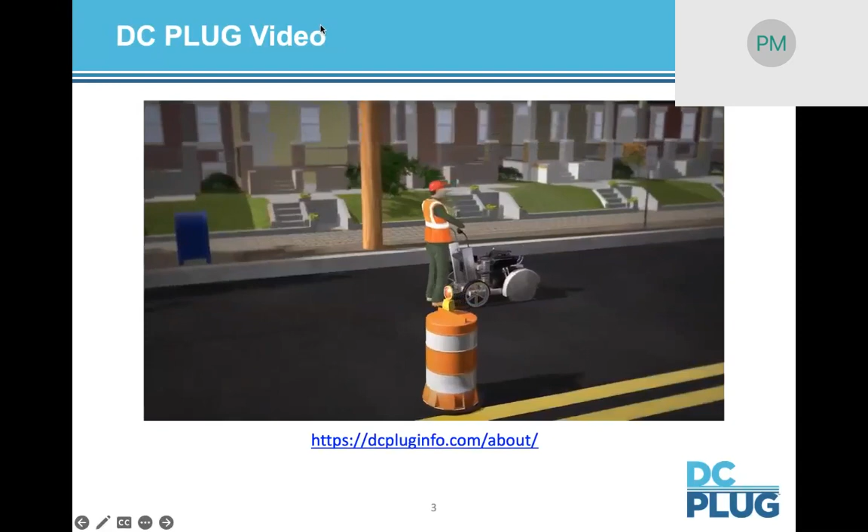Any public property disturbed by this work will be restored to its original condition. Construction workers will use asphalt saws to cut the pavement. A backhoe will dig a trench for the placement of the distribution line. Periodically along the main primary line, manholes and handholes will be required to house equipment and to provide access for inspections and repairs.

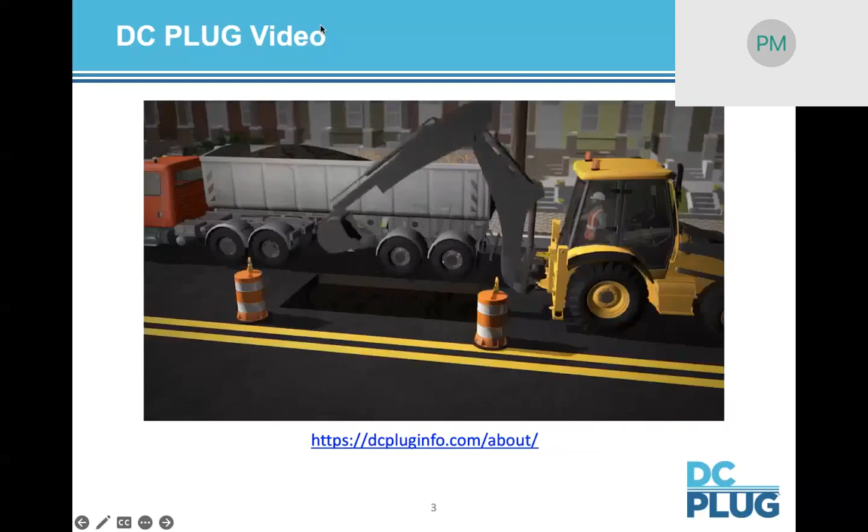The backhoe will also be utilized in these cases to excavate for these structures. In order to meet jurisdictional safety requirements, shoring will be provided in the trench to ensure stability. Pepco uses either fiberglass or plastic PVC conduit to protect underground power lines. Concrete will be poured into the trench to encase and secure the conduit, and steel plates will be placed over the trench temporarily to make the road usable to vehicle traffic.

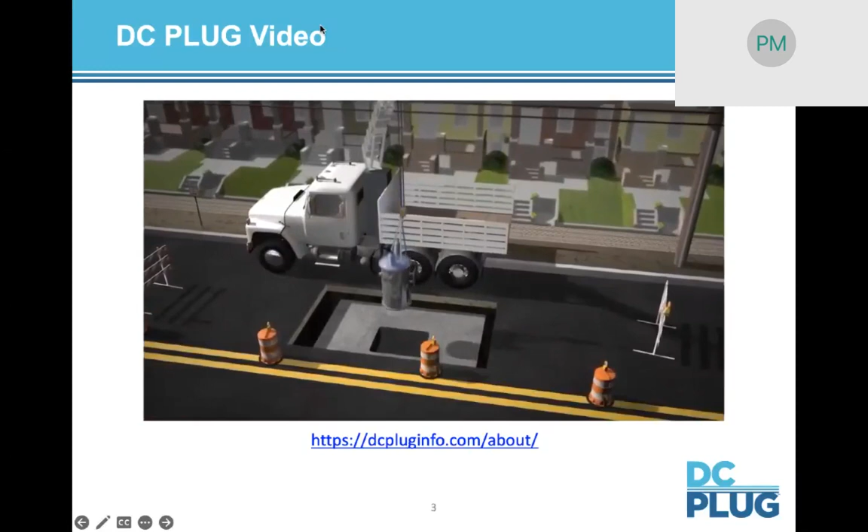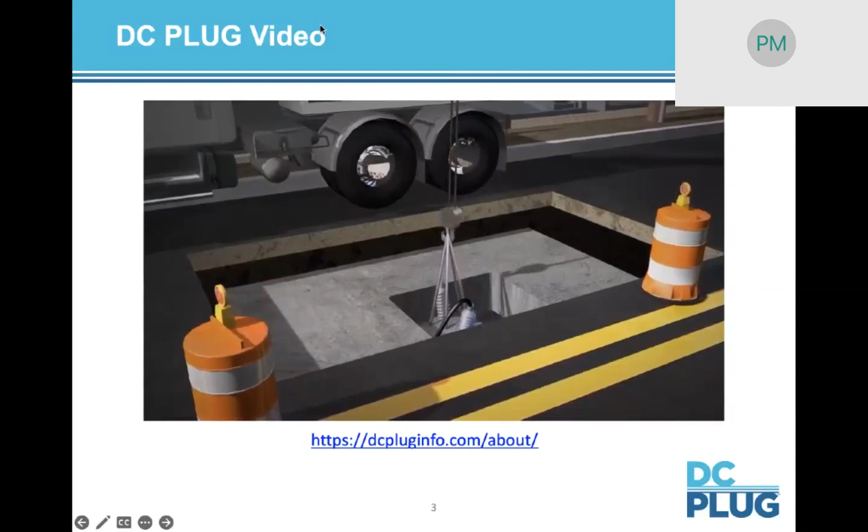After the concrete is set, the steel plates will be removed and the trench will be repaved in sections. Transformers, switches, and other ancillary equipment will be set in place, installed either in the roadway or the sidewalk depending on space availability. Underground cable will be installed. Landscaping will be restored as needed and roads paved.

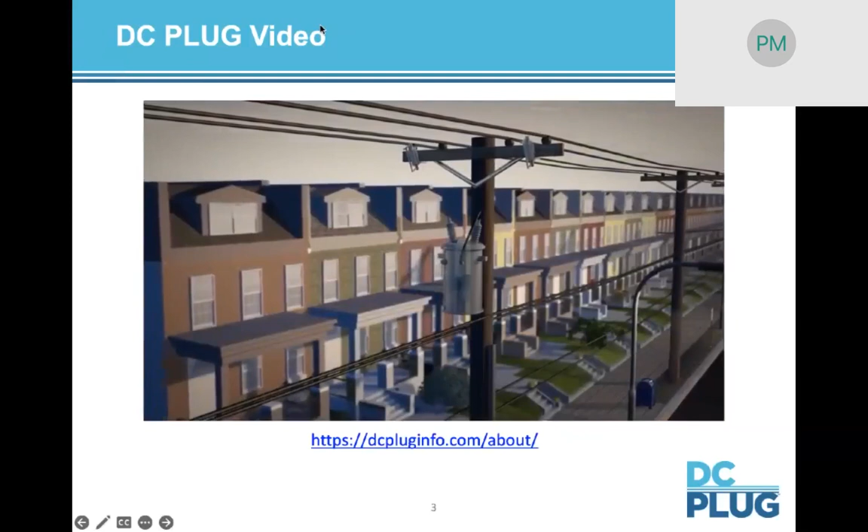Overhead primary electric wires will be removed from poles, but secondary service and communication lines will remain. Finally, the new underground power lines will be energized. While electricity will remain on throughout the project, there will be a short scheduled outage needed to switch from the overhead lines to the new underground system. We appreciate your patience while the District and Pepco improve the future of electrical service for the District of Columbia residents.

I hope that gives you a brief understanding of what construction will look like when that comes. Again, for this feeder, this is currently a design project, so we are some time away from construction, and right now we're just trying to get a good understanding of any feedback you may have on what our current design looks like.

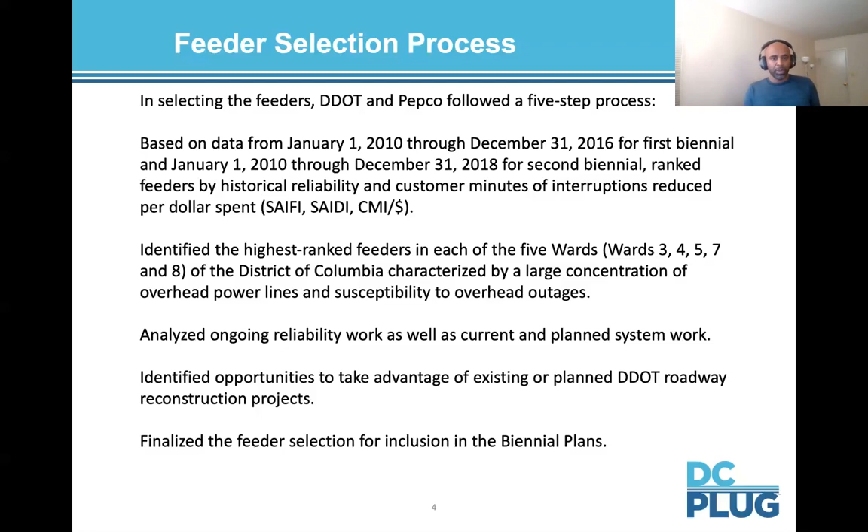Next slide. So what does DC Plug do? We've shown it in a video, but the scope of DC Plug can be summarized by this diagram here and the next one.

In the current overhead state of the distribution systems, where we have the primaries, laterals, and secondaries already overhead, if a tree falls, as depicted at the middle top of the page, you can see a tree falling and hitting the primary lines, and the houses changing from green to red. That shows the houses have lost power.

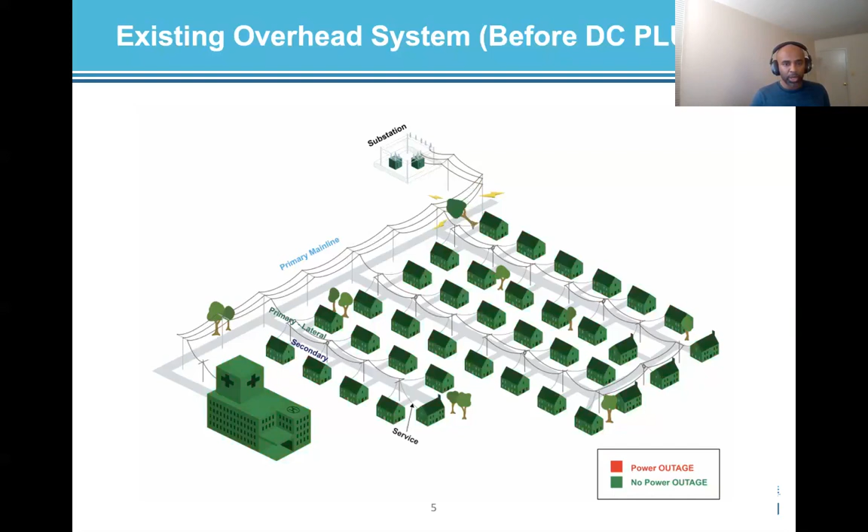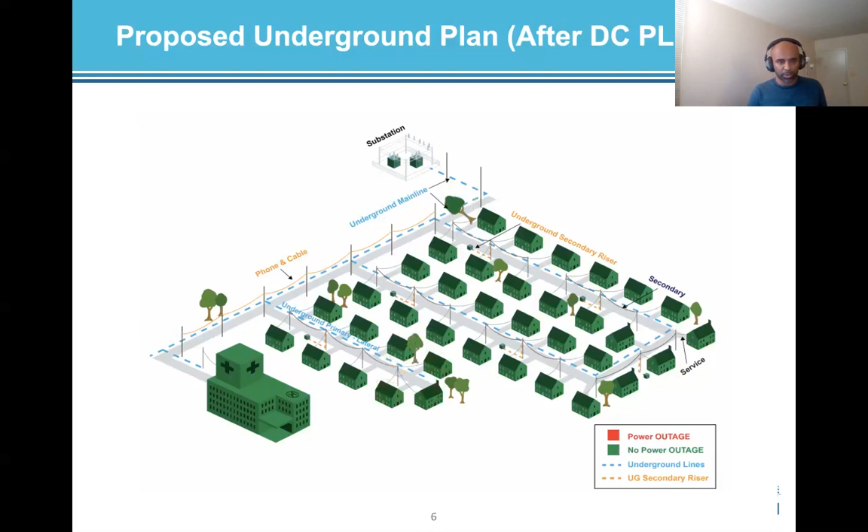Next slide. With that, I'll pass it on to Anthony Soriano from DDOT.

Thanks so much, Imani. What we see here is our current status and timeline for the Feeder 15171 design. We kicked this project off back in April of 2022. We had various submissions, 30%, and our most recent was 65%, just in November.

Over the course of the design, we've had a meeting with our council member in Ward 8, and also attended ANC meetings for those ANCs that the footprint of this project falls within. Currently, we're conducting this open house, and then our next two milestones are the 100% design submission anticipated for February of 2023, and then the final plan, specification, and estimate package, which will allow us to move into the construction procurement process. Next slide, please.

And speaking of construction, when that procurement process is completed, we will have a contractor on board to perform the civil construction, which will begin likely in winter of 2024, so January, February 2024, current expected start date.

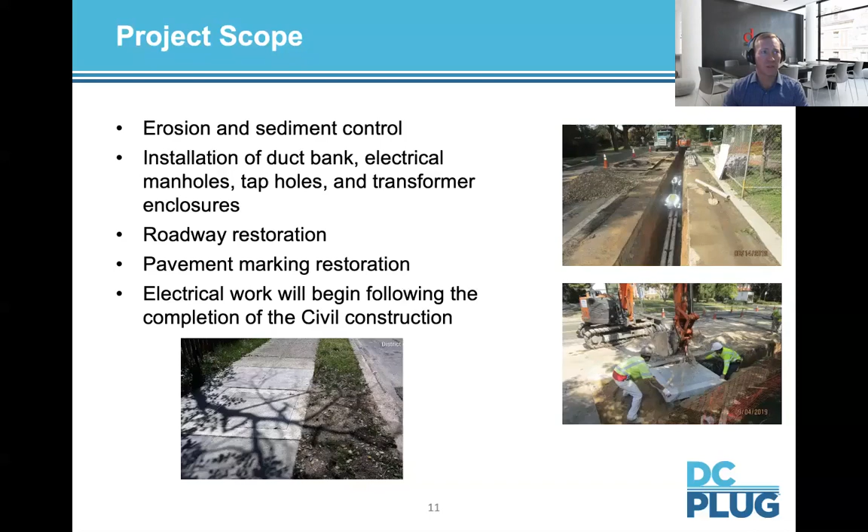Following that will be pavement markings, including any crosswalks that may have been disturbed. We'll also look to improve any existing crosswalks that might not be up to the current standards as far as the markings go. And then again, once the civil work is complete, that electrical work will follow.

Next slide, please. And here we see some examples of the structures that are included in the scope of work. At completion, they will be at grade and typically housed between the curb and sidewalk. Sometimes they will be within the sidewalk. I will note that all of this work is taking place within the public right-of-way, so none of this work falls on private property.

We understand that residents are responsible for the upkeep of this land between the curb and their home, so there's a lot of ownership that is understood. You take pride in the property that's there. We want to make sure that we work with all residents who may be impacted by the installation of these structures. We try to strategically place them in locations that are not as impactful as they could be, and anyone with a structure located adjacent to their property will be contacted separately to provide a little more detail in a one-on-one situation.

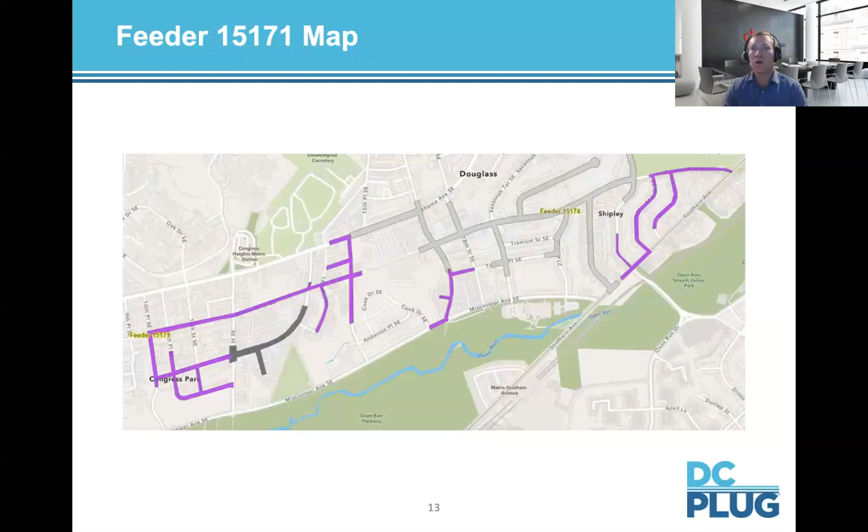Our next few slides will take a look at the current routing of the underground system. The lighter blue depicts the duct bank, which will be completely underground and not visible after the work is complete. The darker blue are structures proposed at current locations for those structures. Again, we saw a few slides back what those would look like upon completion, visible at grade.

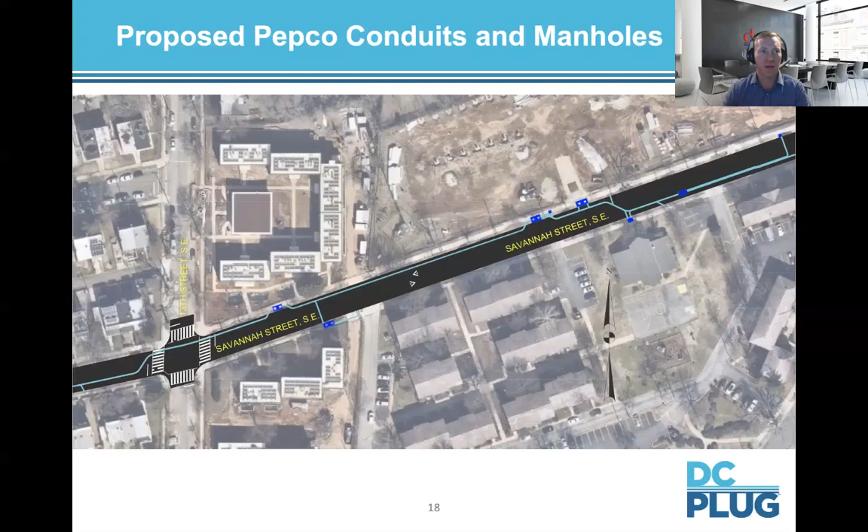I should have touched on what those structures are when we saw the image. There are tap holes, transformer enclosures, line manholes, and switch manholes. Those house all the necessary equipment. If you look at your existing overhead, you might see some gray or silver-ish cylinders — those are transformers, which will be placed underground in what we call a transformer enclosure. You'll see those removed from the poles, as well as the highest lines on those utility poles, which are the primary electrical lines.

I will note again that all of this work is contained completely within the public right-of-way.

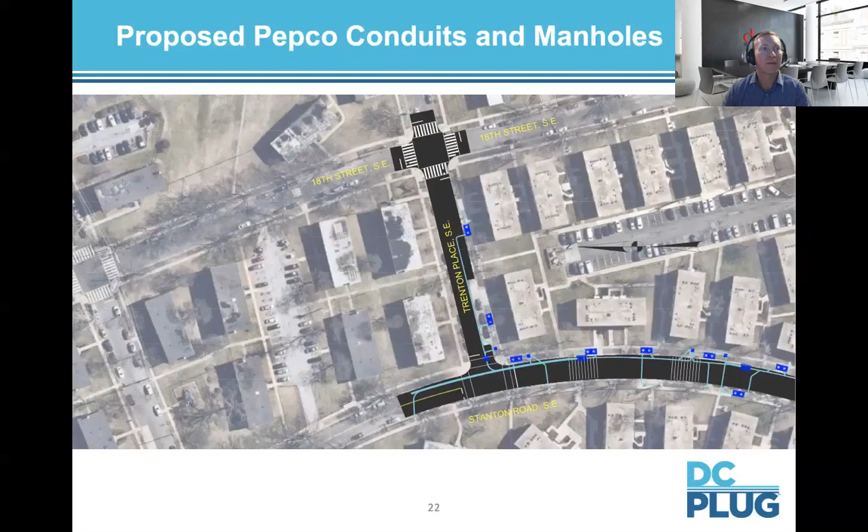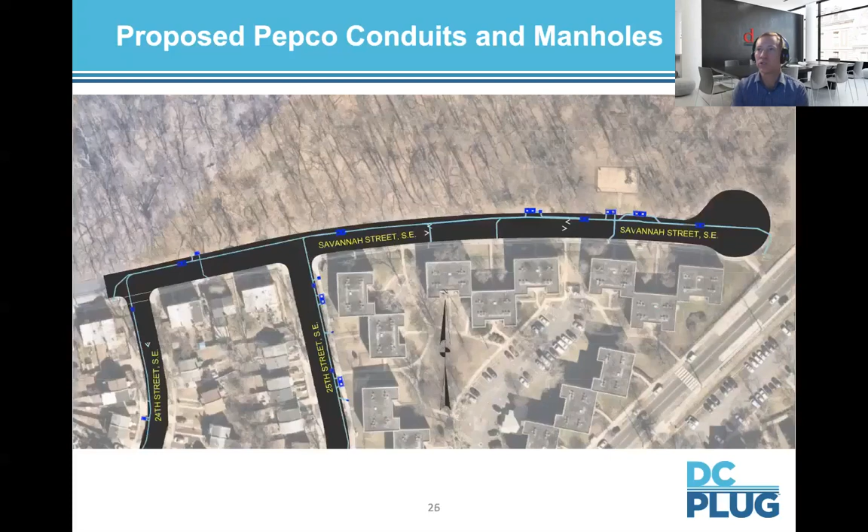Next, once we finish up these current alignments of the duct bank and structures, we'll touch on maintenance of traffic during construction. We want to make sure we maintain accessibility for all residents and businesses, and also services that are provided, like mail, trash removal, and recycling removal. We want to make sure that's all coordinated so you have no interruptions during the work.

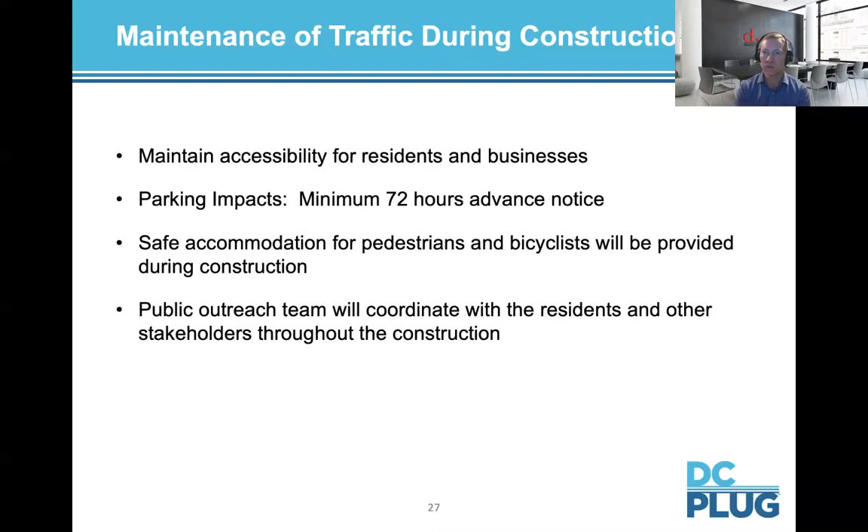There will be occasional parking impacts. We'll make sure there's advance notice, with emergency no-parking signs placed no less than 72 hours in advance when we need vehicles removed for the installation work. We'll also ensure the safe accommodation of pedestrians and cyclists throughout construction, and there will be constant public outreach from our communications teams with residents, businesses, and any stakeholders within the limits of the project.

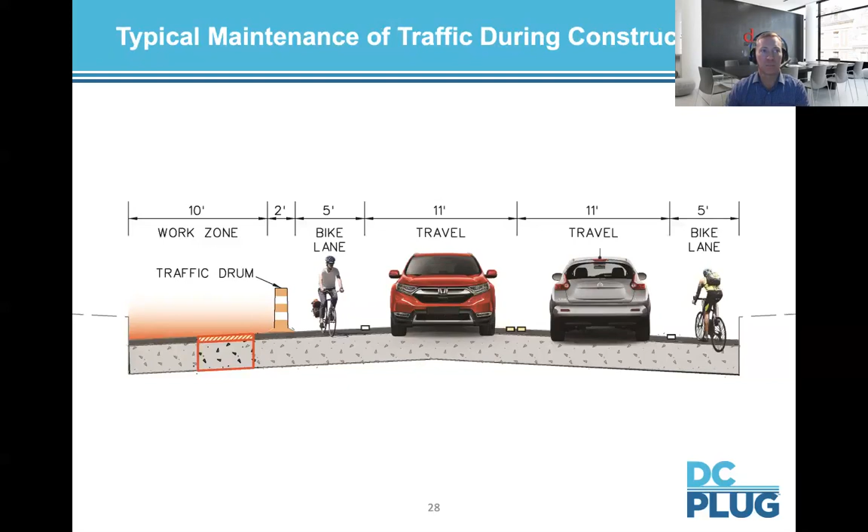The next few slides show some of the configurations we might see for maintenance of traffic while work is occurring within the roadway. There will be traffic drums or cones separating the work from the travel way, with vehicular, cyclist, and pedestrian traffic maintained throughout. These are just typical setups — there might be some instances where variations from what you see in these slides are necessary.

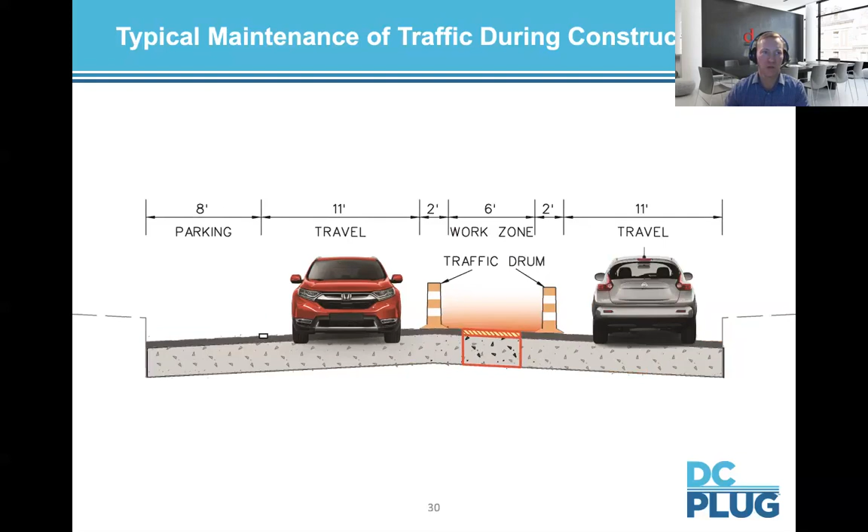There may be an occasion where a roadway shutdown is needed for the installation of a larger structure. That would just be a temporary shutdown, maybe a couple of hours, to get a crane set up, remove the structure from the back of a flatbed truck, place it into the excavation, then the crane can be demobilized and moved from the site, and the roadway reopened. Again, those would all be communicated with impacted residents well in advance of that work taking place.